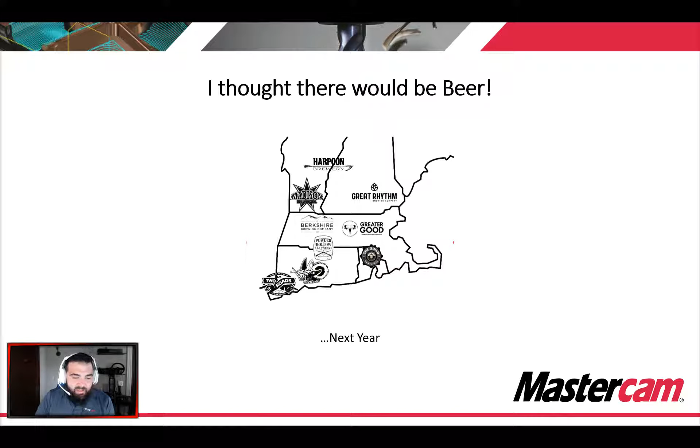So if you've come to any rollouts before, obviously this is different. This is web based. We normally do them at breweries across New England, last year and the year before. So hopefully next year we'll be back doing that. So hopefully you guys are enjoying a beer while we do this. I won't tell anyone. I don't have any beer, not yet.

So general mill enhancements, we're going to jump right into it. Let me just move my screen around here. The Toolpath hole definition function panel includes two enhancements now. On the selection tab, a summary of all edited change at point parameters are now conveniently displayed on a tooltip in the features list. That's the picture to our left.

The advanced tab now allows the option for multiple solid bodies. This option recognizes same size holes across multiple bodies when selecting with a control click. So if you have two solid bodies, you can find all matching hole sizes across both just at once. Just a minor enhancement that you probably didn't even know you needed. That's a pretty common theme throughout our minor enhancements that add up to a better product and allow you to program quicker, more efficiently.

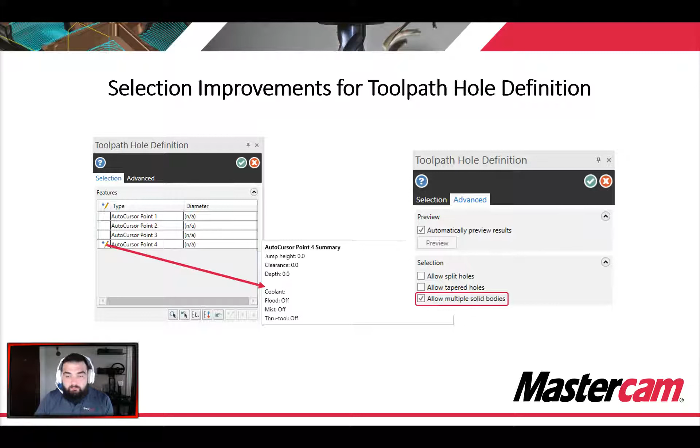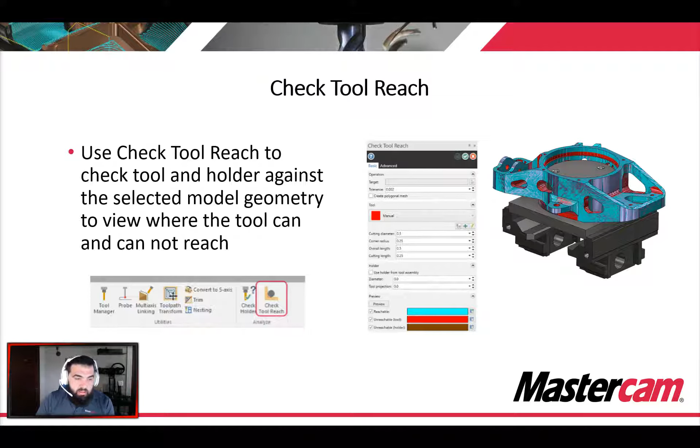Check tool reach. I have a quick video I'm going to show on this. Basically, we use check tool reach to check the tool and the holder against your selected model geometry to view where the tool can and can't reach. It's right next to check holder on the top Toolpath tab.

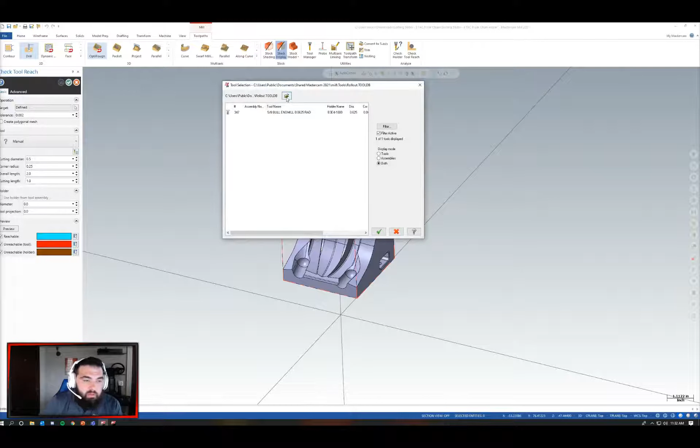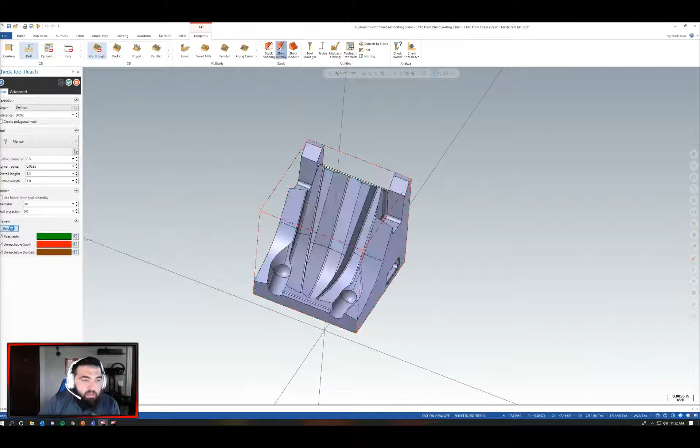Here's a quick video of it in action. So we're going to click it. Here we're going to select the model that we're checking against, our target. Our tool, we're going to select from our tool library. I'm just going to select that end mill. Then we can change the color of what we want to see as a result - I'll say green is reachable. Hit the preview. Now everything green is reachable with that tool and holder setup that we have, that assembly. Now, if I want to quickly change between the cutting diameter, I can right at the top there. A nice little feature, especially if you already use check holder. This is just another tool in your toolbox.

So 2D mill enhancements. I broke this up into 2D and 3D. First one we're going to go over is skip pockets based on tool diameter or pocket size. We've had this in some of the multi-axis toolpaths, but now it's available in 2D dynamic mill and also 3D dynamic OptiRough. There's a new option to skip all pockets, as well as skip pockets smaller than a percentage of your tool diameter.

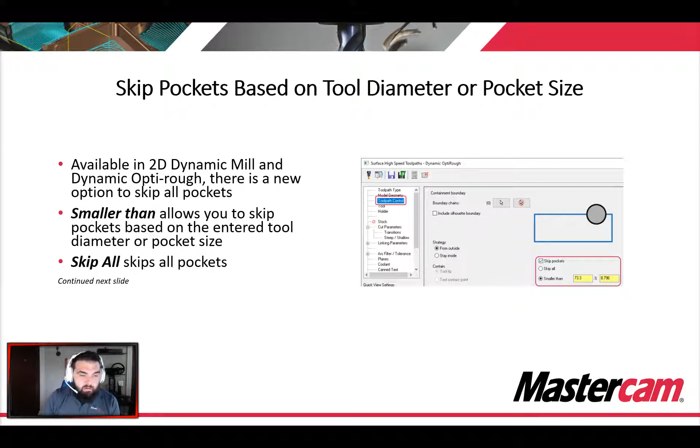So basically what that means is after I toolpath a roughing operation, if I set my tool diameter percentage to 0, the resulting toolpath will be pretty complete. As I move the tool diameter percentage up to say 300 or 350, it's going to start cutting out pockets that the tool wouldn't fit. So it's nice because you could chain your entire part, but if you know you only want to hit the smaller sections of the part, you can just use this to control it. You don't have to make multiple selections throughout the part.

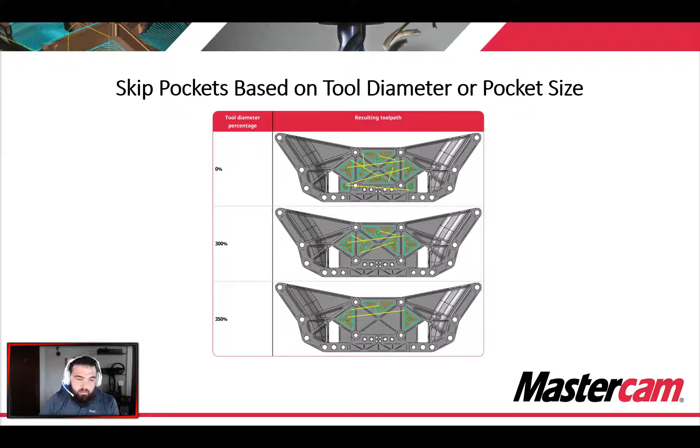Advanced drill, so multi-segment drill cycles. Advanced drill is a new toolpath, separate from just the regular hole making drill toolpath. Advanced drill is useful for spot drilling, deep hole drilling, and back spot facing.

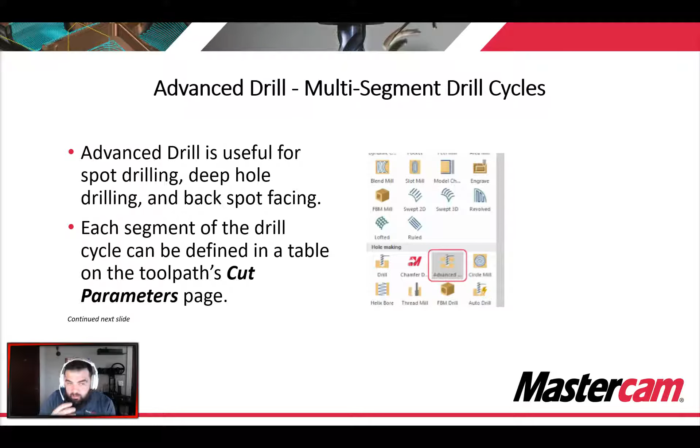Each segment of the drill cycle can be defined in a table on the toolpath cut parameters. My next screen will show what that looks like.

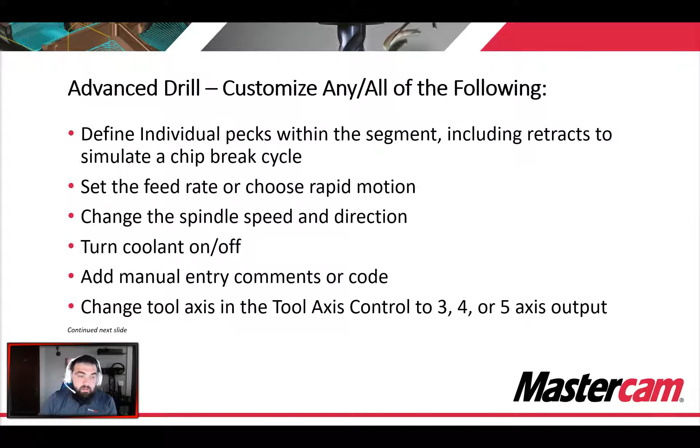Basically, we can define individual pecks within the segment, including retracts to simulate a chip break cycle. We can set a feed rate or choose a rapid motion. We can change the spindle speed and the direction. We can turn coolant on and off, add manual entry codes, or change the tool axis control, all within basically the same path.

Each depth that I'm going to cut to can have individual parameters. So if I cut to, in this case, 350 thou, then my feed is at 5, spindle direction, RPM, coolant, and a dwell. So each segment can be modified.

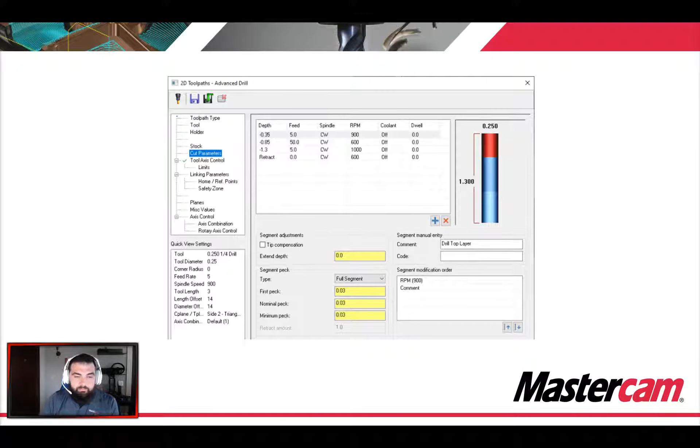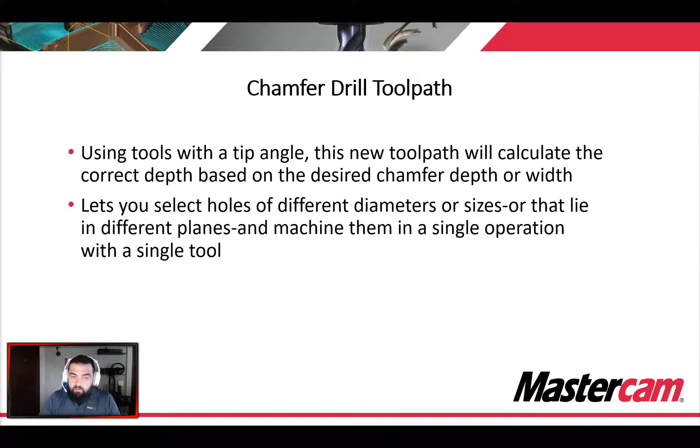Chamfer drill toolpath, this is another new toolpath. Using any tool with a tip angle, this new toolpath will calculate the correct depth based on the chamfer depth or width. It also lets you select different chamfer diameters or holes that lie on different planes and machine them in a single operation.

Easier to show you here in this video. You don't have to make the chamfer on the hole, I just did it for the sake of the video. I'm going to make 2 different size chamfers.

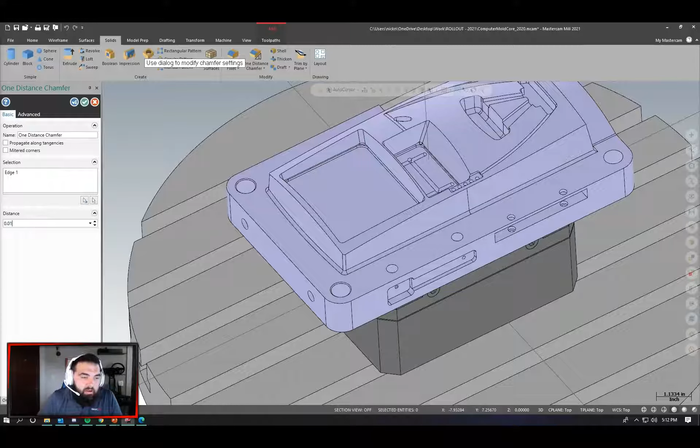So the first one I made 30 thou, I think this one 15. Then we're going to come in here and select under hole making, our chamfer drill.

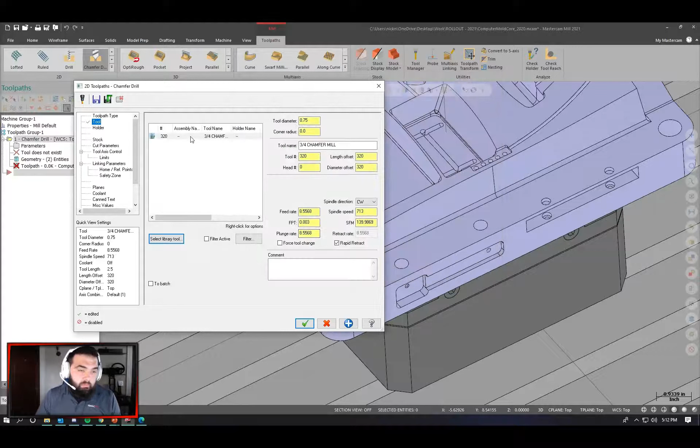Now I'm selecting the part, the 2 holes, selecting the chamfer mill. I'm going to leave that at 0 because I selected the bottom of the hole already.

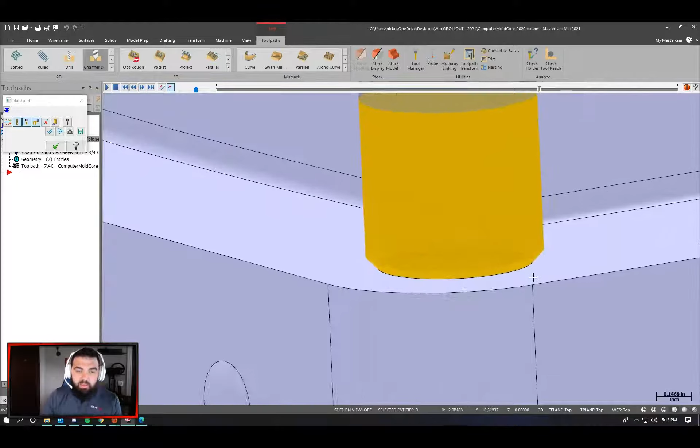Now when we backplot, that's going to hit the chamfer perfectly. And then that's going to hit the other chamfer. Even though they're 2 different sizes, the toolpath is smart enough to know what you're trying to do. And we'll post it.

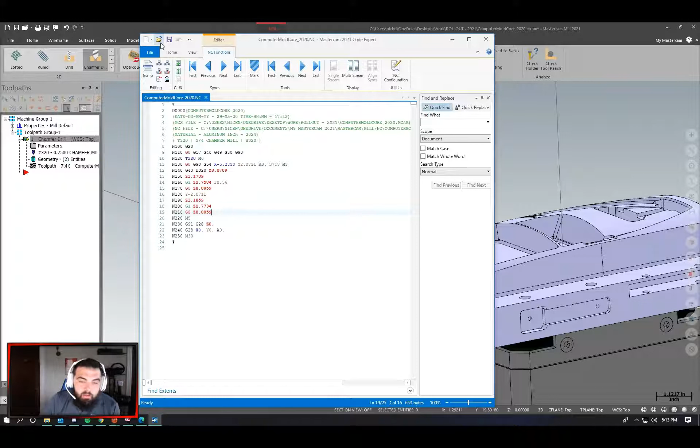Just to show the different Z depths, so we're going to feed to the first Z depth of 2.7584, and then the second one 2.7734. So yeah, that was all in one toolpath. Gets both holes done.

Oh, that's the same video.

All right, pre-machining corners for dynamic mill toolpaths. I'm sure you've seen this before, where when you run a dynamic mill to rough out an entire large area from maybe a piece of stock, what gets left behind a lot of the times is the corners. So what they did is they added a pre-machining operation to come in and rough out those corner pieces first before it starts doing your normal dynamic mill roughing.

So it's just a nice feature when you're going back, and you don't have to go back and clean anything up.

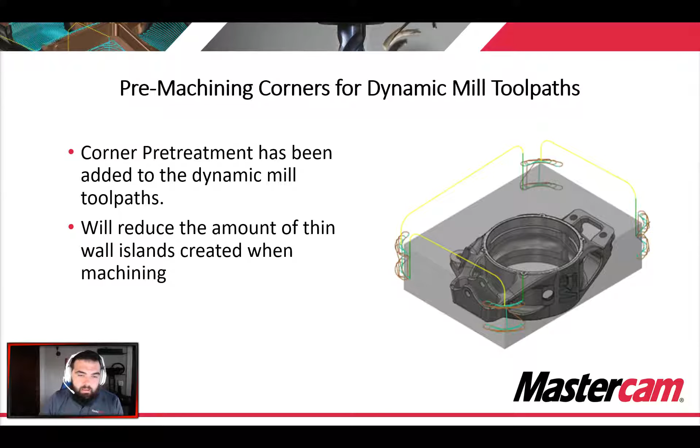Swapping lead in and lead out parameters. This is another nice little quality of life, make things easier for you type switch that if you started using the software today, you just expect that to have been there the whole time. We can actually switch our lead in and lead out options between entry and exit.

For instance, if entry is set 50% and exit is set 100%, and now I just want to swap them vice versa, I can just hit that swap button right under copy over.

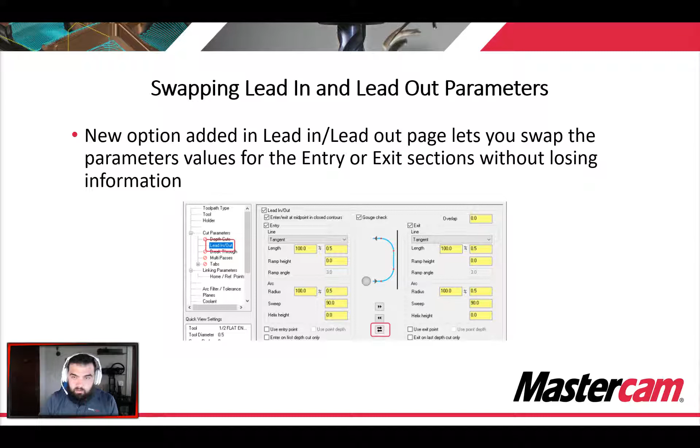Next up, arc fit linking and feed move override. So this one's pretty cool. I haven't seen it run on a machine yet. I'm confident it does, but I'd like to see it because it looks like a pretty cool option.

Basically, what we can do is the arc fit maximum radius option itself attempts to fit 90-degree arc moves into rapid and clearance moves. The output feed move option outputs the rapid move as a feed move. So basically what that's saying is, let's see if I can point to it here.

So with both options off, meaning we're just going to retract normally, retract to almost a 90-degree on the retract move over to our next cut. Now with both these options on, what we're doing is we're feeding over to the next cut, but we're swinging an arc and then feeding over, and that feed move can be whatever you want.

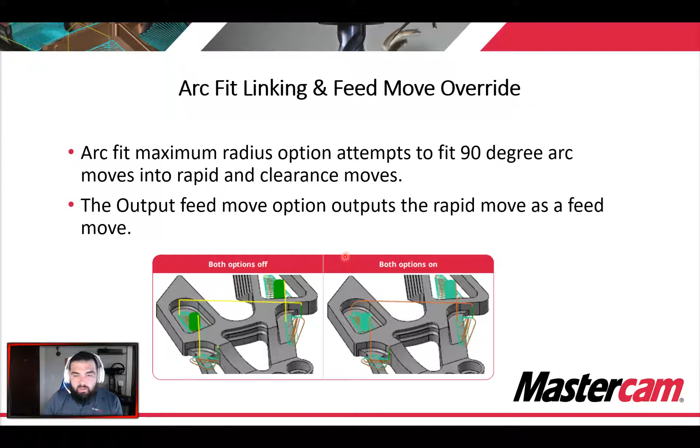So if your machine needs that feed move to be lower, or I guess that reposition move to have a lower feed rate, you have the option in the toolpath as well.

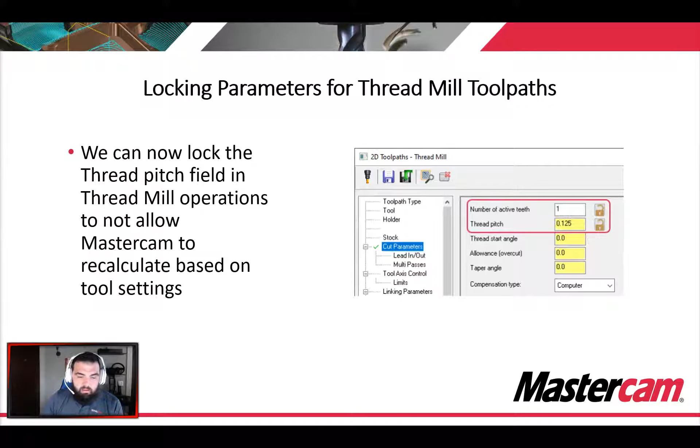So 3D mill enhancements. A big thing we're going to touch on here is the 3D blend toolpath. Last year, they took it from a legacy toolpath and brought it over to the newer style, adding check surfaces and things like that. This year, they've done even more.

First thing they've done is equidistant passes. This means we have the option to add equidistant passes. Mastercam will create the passes equidistant in 3D, adding cuts in steep areas. We're also able to set number of cutting passes instead of step over or scallop height, meaning if I want 10 passes, instead of telling Mastercam every 50 thou to make a pass, I can just enter 10, and it'll cut 10 equal passes between the two pieces of chain geometry.

The equidistant passes I mentioned basically means it's going to add passes for you in steep areas where the tool used to fall off a bit, and those passes ended up being a larger step over than the rest of the part. Now Blend will actually fill in that gap for you, and everything stays to a true step over size.

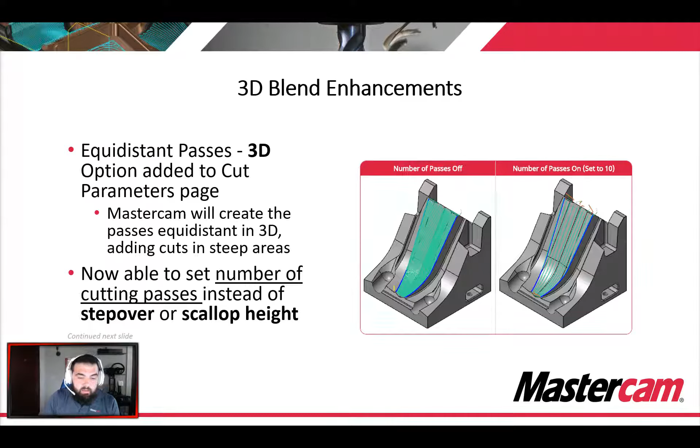The 3D Blend toolpath also has the option to confine your curves to a tooltip or a contact point. Tooltip confines the tool center inside the selected curves, whereas the contact point will let the tool go outside the two curves selected for blend, but the contact point will always hit the drive surface.

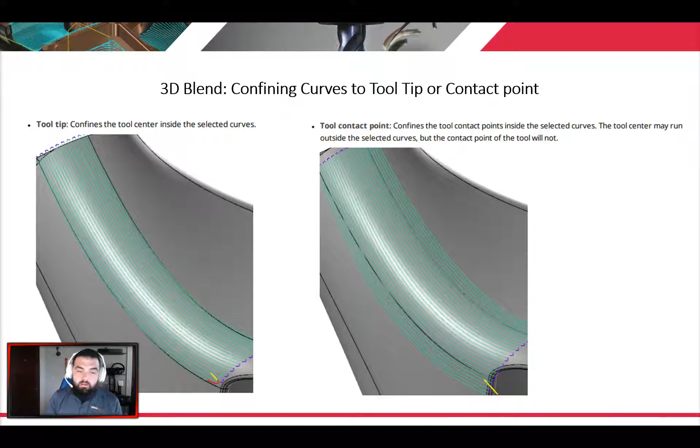So 3D Blend, like I said, I have a lot here on the Blend toolpath. We have the option to machine from center and to center. Some of our other toolpaths have this, and now they've incorporated it into Blend. Pretty self-explanatory: to center, we cut from the outside to the center; from center, we start in the center and move our way out.

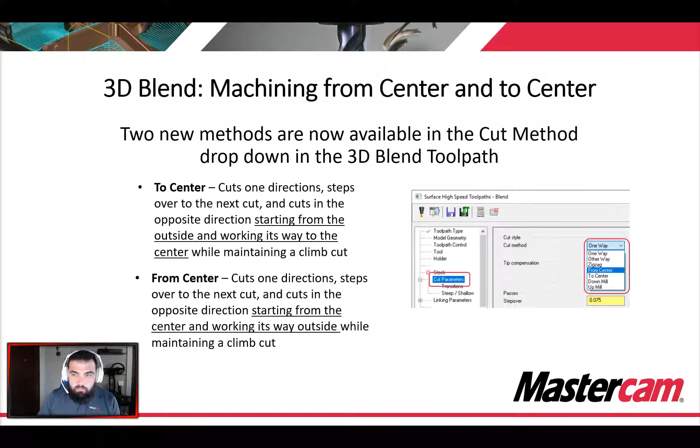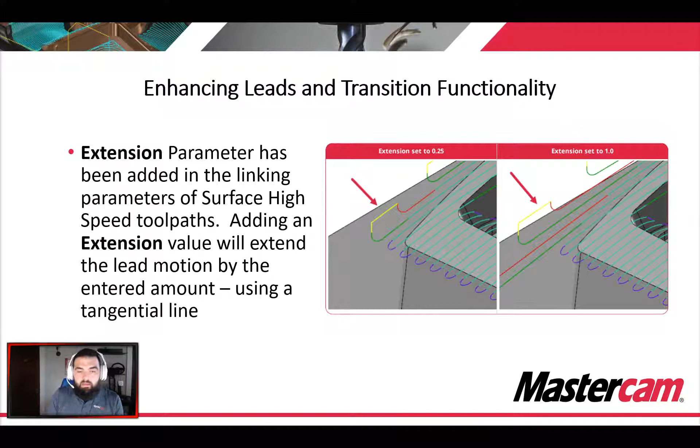So, enhancing leads and transition functionality. This is not just in the Blend toolpath, it's actually in most of the high-speed toolpaths. What we can do now is add an extension. The parameter has been added in the linking parameters of surface high-speed toolpaths. Adding an extension value will extend the lead motion by the entered amount, basically adding a tangential line as a lead-in. We had this option in some of the older flowline toolpaths, a tangential line length which we used a lot. Now we're using those in the high-speed toolpaths, which is nice because that was a helpful tool.

Now we can also apply transitions. It sets a retract motion to be transition motion. The new motion uses the values set on the transitions page. So in the linking parameters, you have a transitions value on the left. With apply transitions deselected, your transitions are just going to look like a full retract. With it selected, it's not going to be a full retract, it's just going to come up and transition to the next cut, feeding itself back in.